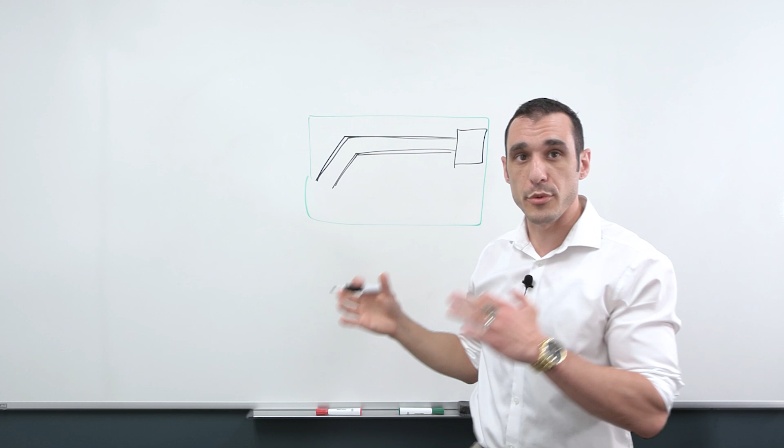I'm just going to draw out a top view of a layout, and we've got our differential pairs. Let's say they're routed at some angle like this. Here's one of my differential pairs, and here's another differential pair, being routed over to a component on some side of the board. The reason you need to take each side of the differential pair and make these traces the same length is so that you can properly read out the signal at the same time on each side of the differential pair.

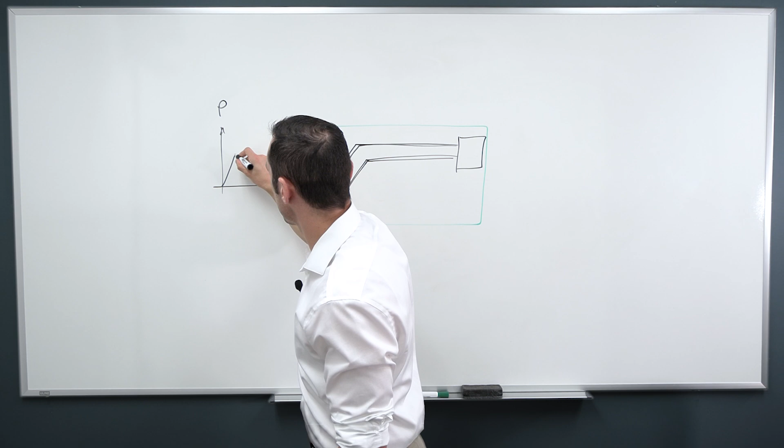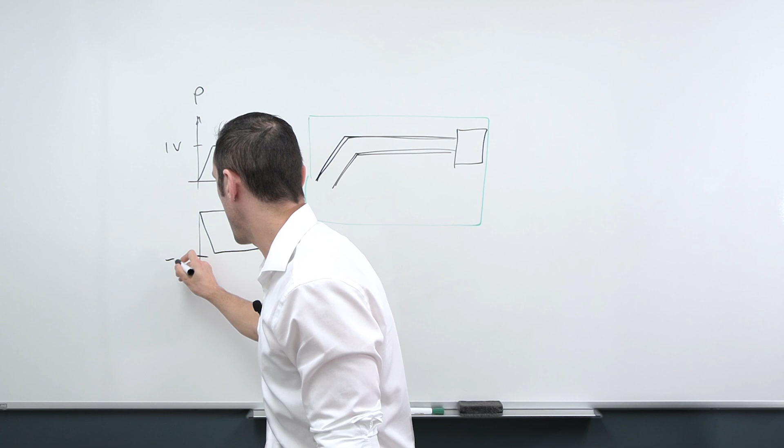Let's look at the graph of the signal to clear this up. On my positive side, I have a signal that looks something like this, and let's say that this is 1 volt. On my negative side, we have an equal and opposite signal. Ideally they have the exact same shape, and ideally this is also at equal and opposite voltage, so -1 volt.

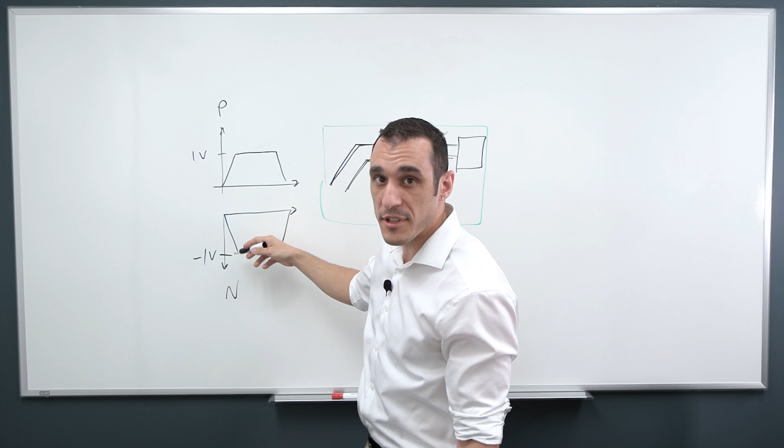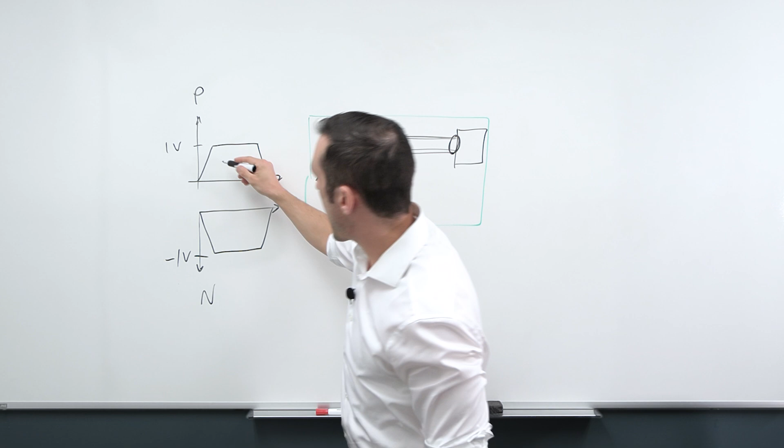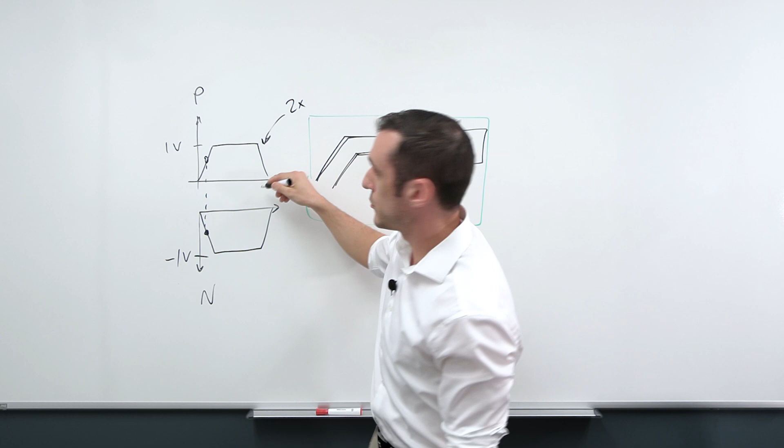In the ideal case, this rising edge of the positive signal, and this falling edge, or rising edge in the opposite direction, of the negative signal, happen at the exact same time. So when the signal arrives on the interconnect, these two signals are changing and reach their final voltage at the exact same instant as they reach the receiving component. That ensures that at this point in time, and the corresponding point on the other end of the differential pair, the difference between these two signals reads out to essentially double whatever your positive signal is, or double whatever your negative signal is, depending on what polarity you want to define.

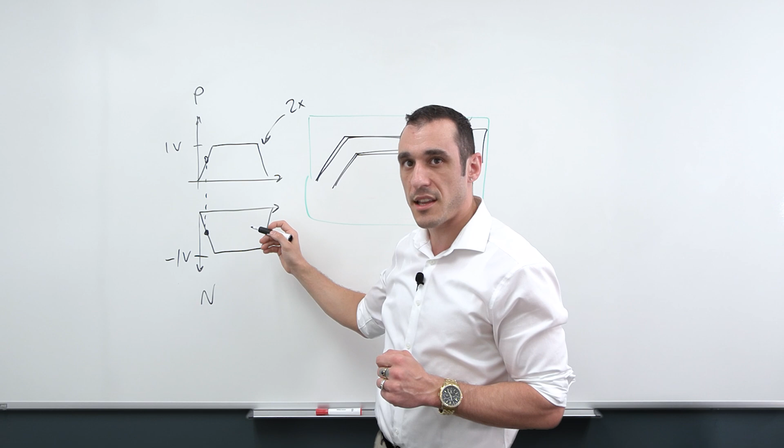This is one of the reasons we need to have the two sides of the pair length matched. When the two sides are length matched, these signals travel at the same velocity, and if they travel over the same length, they'll arrive at exactly the same time at the receiving component. So to see what happens if you don't have that enforced, let's ask the question.

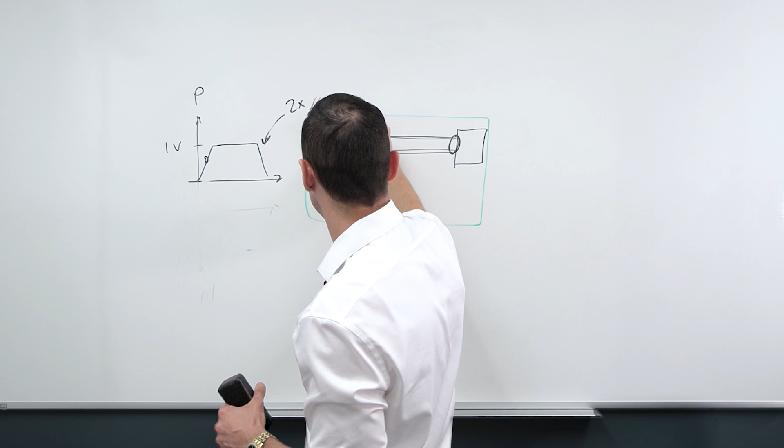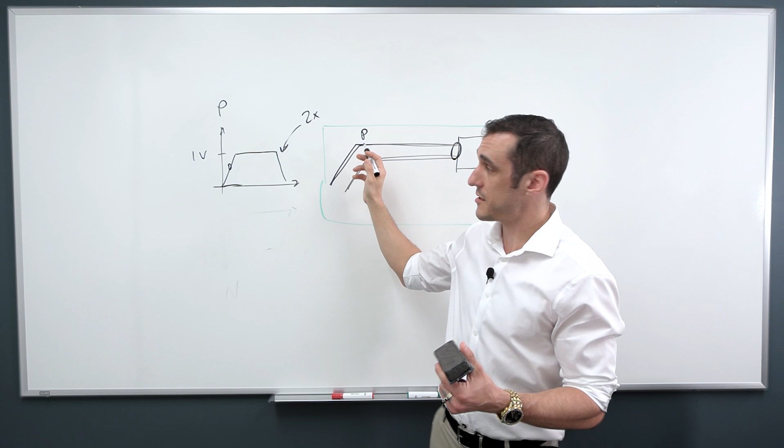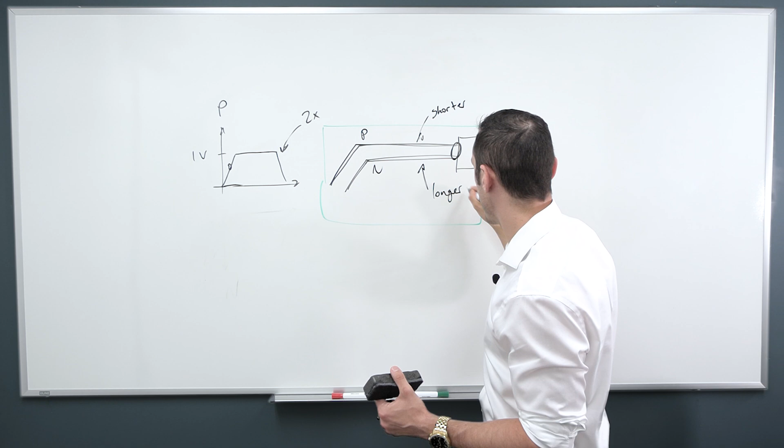What would happen if my positive side, P, and my negative side, N, have different lengths? If they have different lengths but travel at the same speed, then one of the signals, let's say the positive side, is going to arrive at a different time than the signal on the other side of the pair. Let's say this is the shorter length, and this is our longer side of the pair. So if these two have different lengths, at t equals 0, at this instant at the receiver, the positive side has a signal that starts rising.

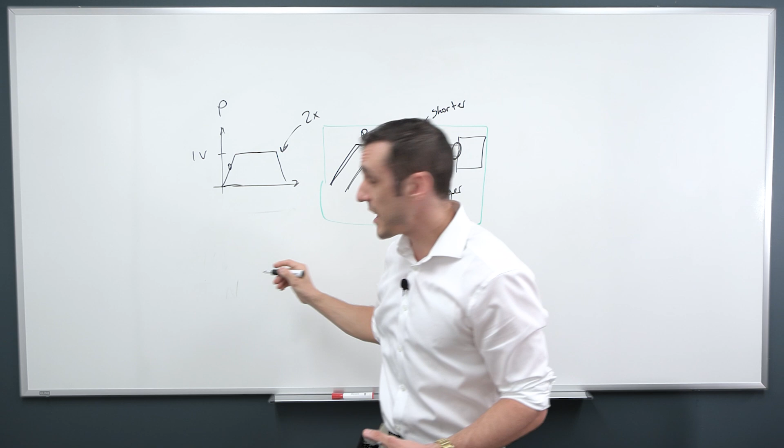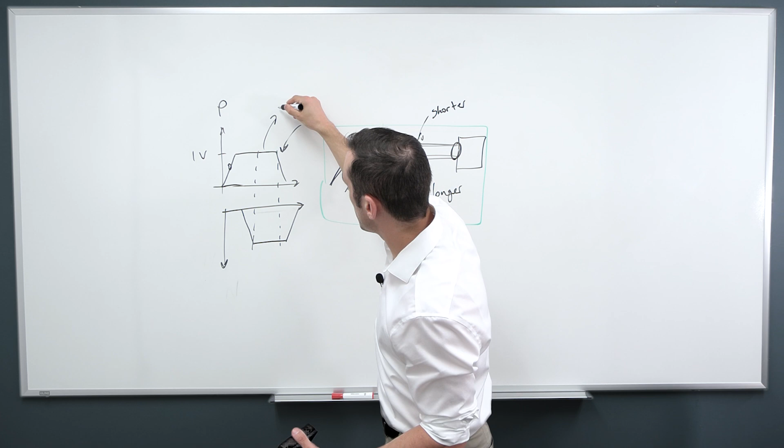Now if the negative side is longer, the signal is going to be delayed. What happens is, if it's delayed a little bit, they don't line up, and you only have a match between the two signals in this small interval of time. So the voltage needed to induce a digital logic state in the receiving component only exists within this time period, and you'd only have 2 volts measured between these two traces in this time window. If the two don't overlap, you may not read out the digital state correctly at the receiving component.

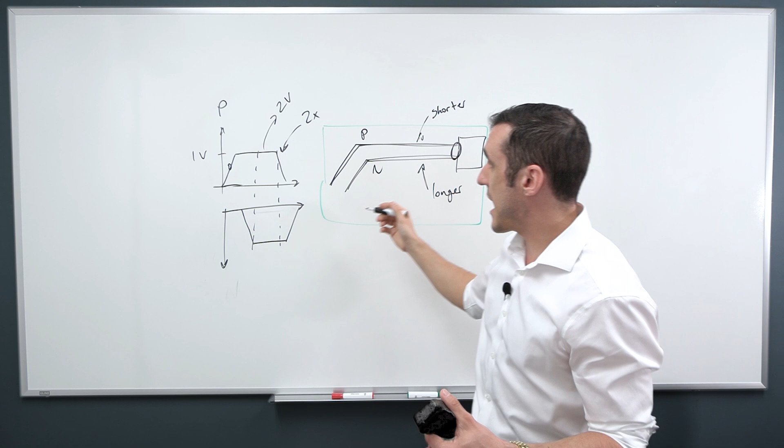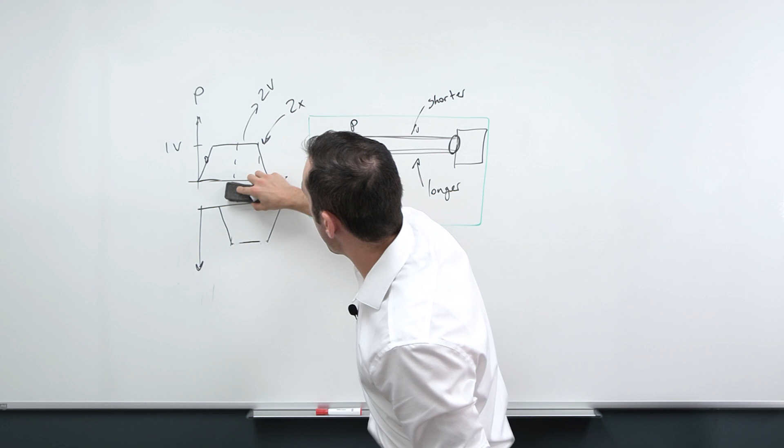Now there's another reason we need the two length matched. Reading out the digital logic state being transmitted over this pair of traces is important, but there's another reason, and that relates to being able to cancel noise from the interconnect. Let's say that way back at the beginning of this signal's life, when it was sent from a transmitting component at the beginning of this interconnect, there was a little bit of noise induced on this signal as it rose.

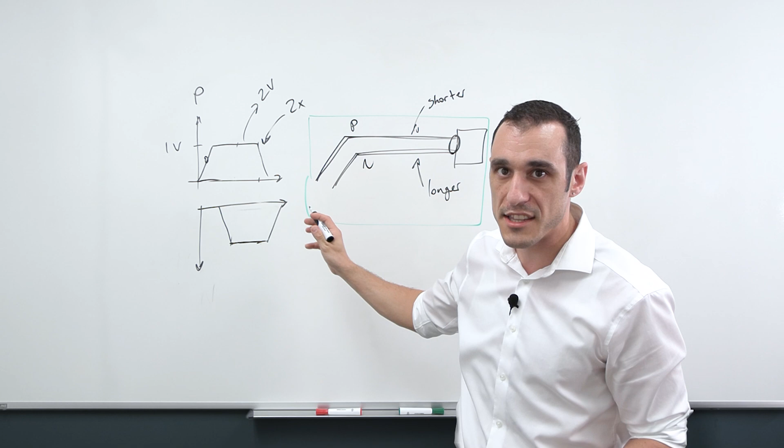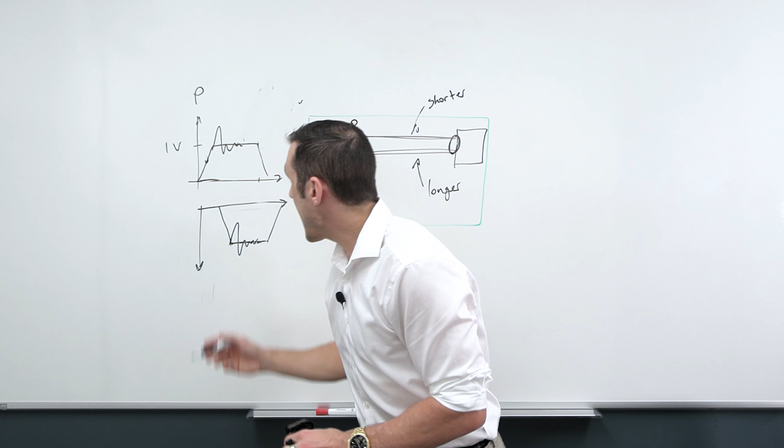On the positive signal, it started right here, and there's some bit of noise. On the negative signal, we also had that same issue back at the transmitter, and we have that same noise—so this is all common mode noise. Now if one of these signals is delayed on this transition between the transmitter and the receiving component, you now have a mismatch between the timing of these two noises.

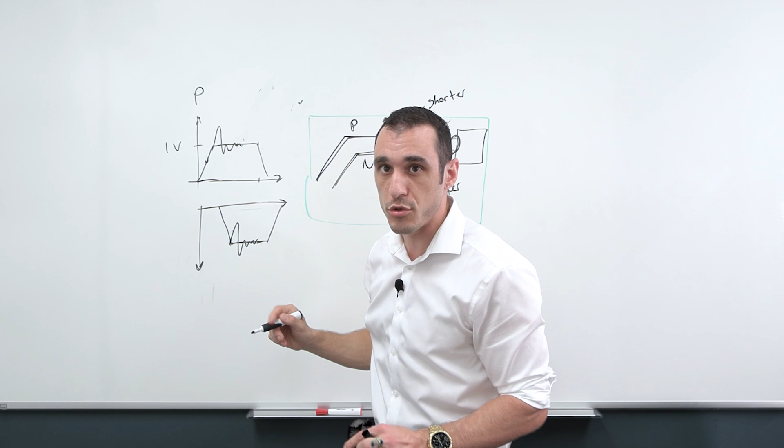So if there's any mismatch between the timing of these two noises, when I then take the voltage on the positive side minus the voltage on the negative side to read out the signal, you'll notice that I need to subtract out these two noises in time.

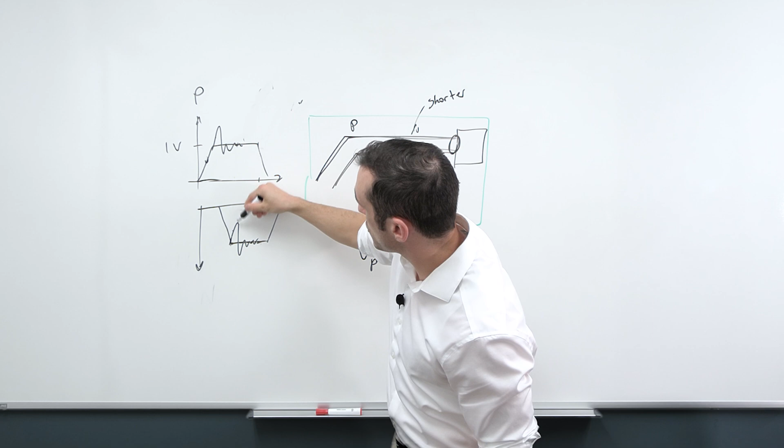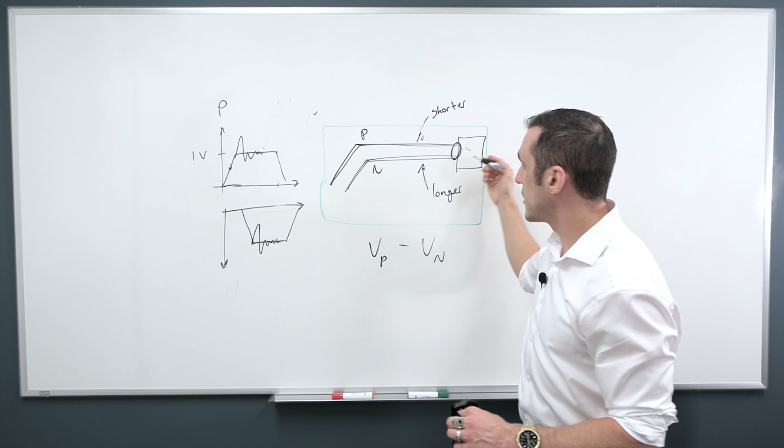But because they don't overlap, they don't actually get subtracted. This is the other reason you need to make sure the lengths of your differential pairs are matched: to ensure that if there's any noise received anywhere else on the interconnect, that noise is coincident on both sides of the pair at the exact same time at the receiving component. That's what allows the receiver to cancel out this common mode noise and eliminate it from the signal it actually needs to measure.

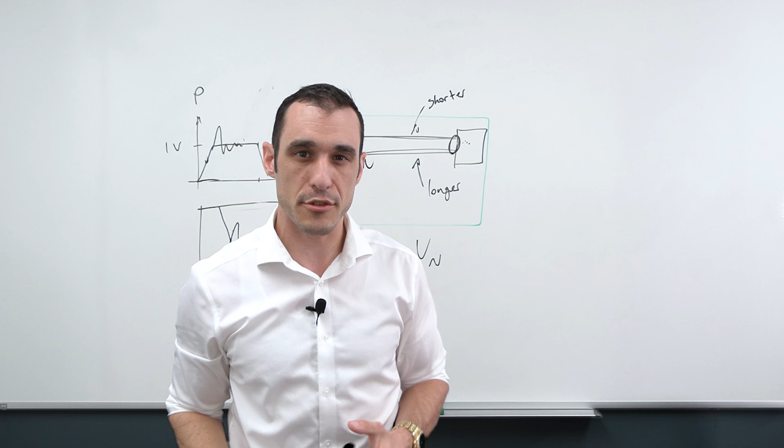In order to do this, let's say this trace is longer than this trace. What we need to do is lengthen this trace a little bit, so we need to increase its length. If you watched the previous video, you'll see I showed this little tiny structure that gets added in order to match the length of these two pairs.

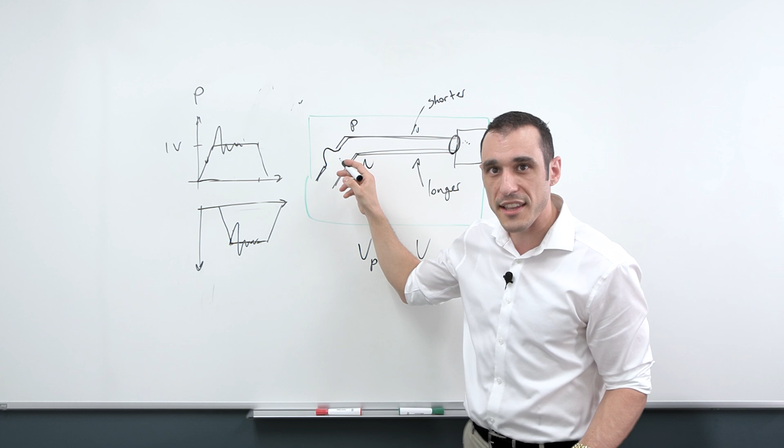Sometimes you just need to add a little bit of length. In the previous video, when I showed an overlay in Altium Designer, it was just a little nudge like this, and that was enough to bring the lengths of these two traces to the same length so the two signals line up in time. Then you can properly cancel out the noise and read the signal level over this entire unit interval.

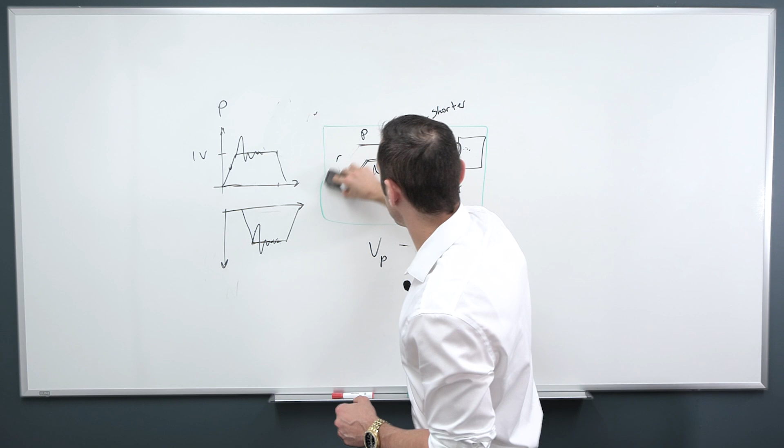Now sometimes the length matching you need to enforce is a bit more extreme, so maybe you don't have one of these little bumps here. Sometimes what you'll see is a series of bumps like this. This is sometimes called serpentine routing. There are a bunch of different names for these different types of structures, but this is the most common one, which is just serpentine routing.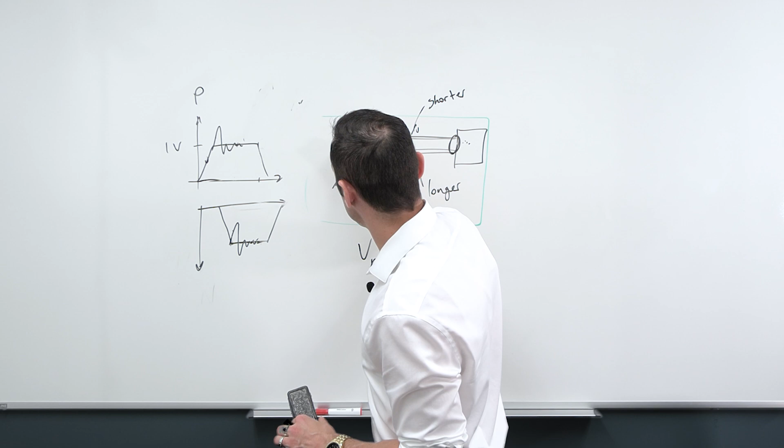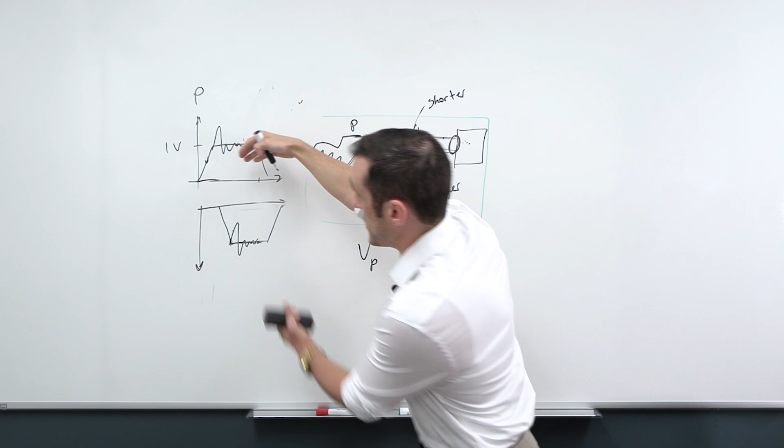Sometimes you can get a bit more interesting with your length matching, and you'll see something that looks like this trombone structure, called trombone length matching, or sometimes accordion length matching. There are different names for it based on the shape of the structure you need to enforce. The idea is you pack this large section of trace on the positive side in order to lengthen this trace enough that these two signals overlap in time. Then you can correctly remove all the noise from that signal.

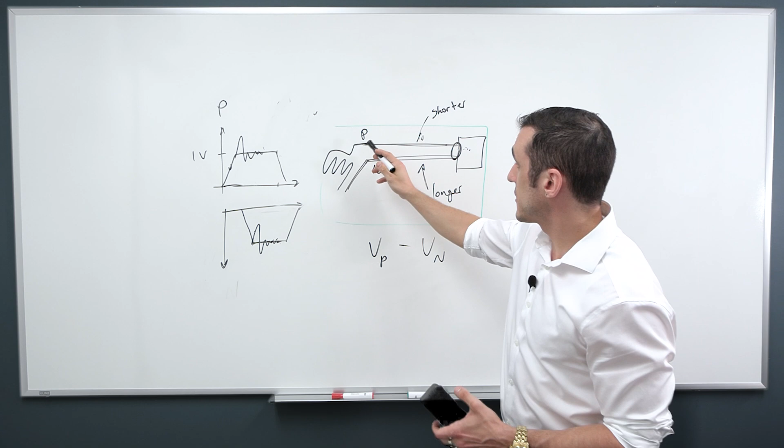If you're using Altium Designer, or another design software, they have tools that will automatically add in these sections of trace length so you can make sure your differential pairs are properly length matched over the entire length of the interconnect. Those are accessible just in the standard routing tools - it's not like you need to buy an extra package to do that.

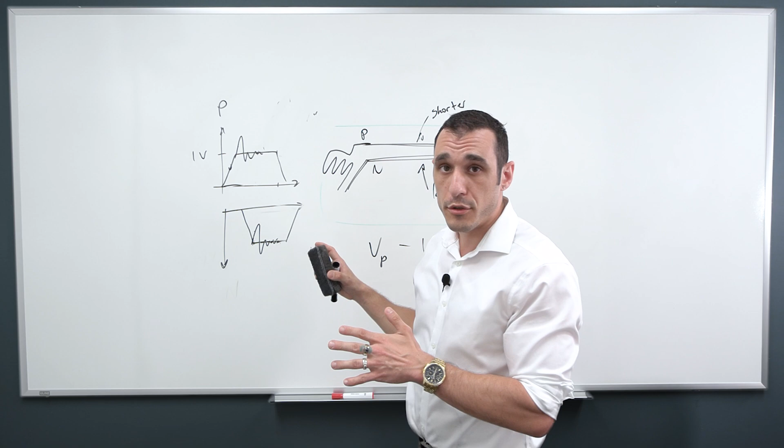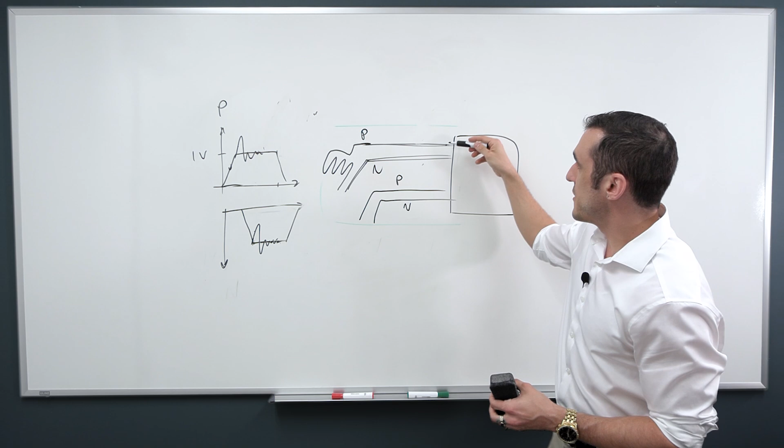The next thing I want to look at is that sometimes you have groups of differential pairs being routed to a very large component. So I'll use this as an example - here's my positive side, here's my negative side. Sometimes you have to make sure that not only do the two sides of the trace within a pair match up and align at the same time, but also between different pairs - they also need to match up, and signals need to arrive at the same time.

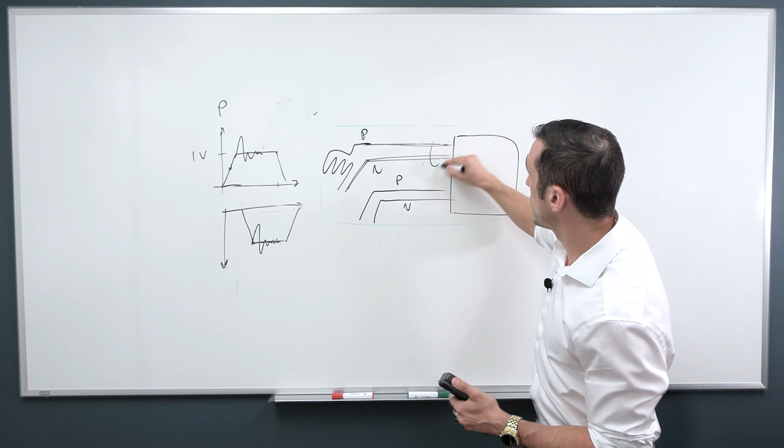Sometimes what you have is one pair having one length, and your second pair having a second length, L2 versus L1. If L1 is longer than L2, what do I have to do? Well, I can't make L1 shorter - I suppose I could, but it's actually a lot easier to just make L2 a little bit longer.

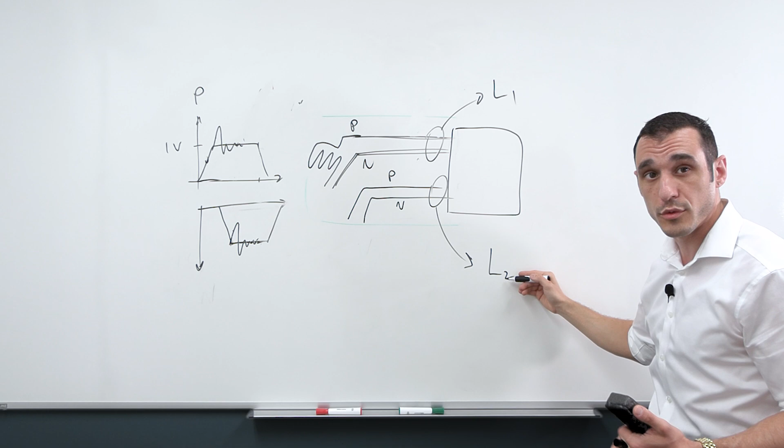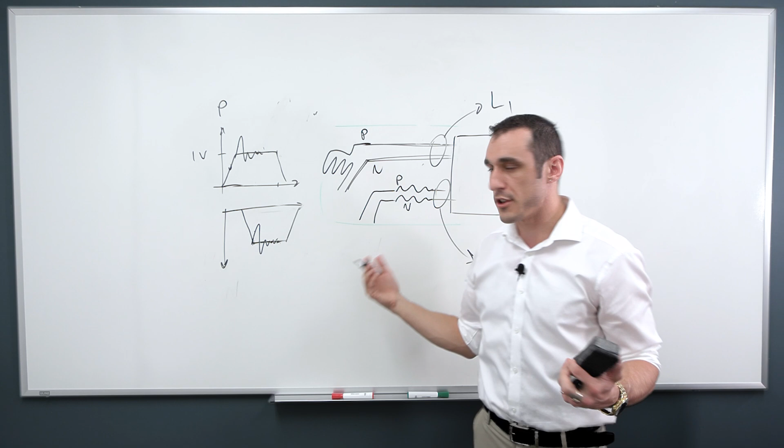To do that, you would apply length matching to both traces. The length matching you apply needs to be symmetric. If you go on Google Images and look up length tuning structures for PCBs, or a similar search query, you'll see a lot of really interesting images showing how this gets enforced. We're going to have some demo videos on the channel that show how you can enforce that and what it looks like on a PCB layout in your CAD tools.

Hopefully this shows you why you need to length match each side of a differential pair, and sometimes why you need to length match multiple differential pairs.

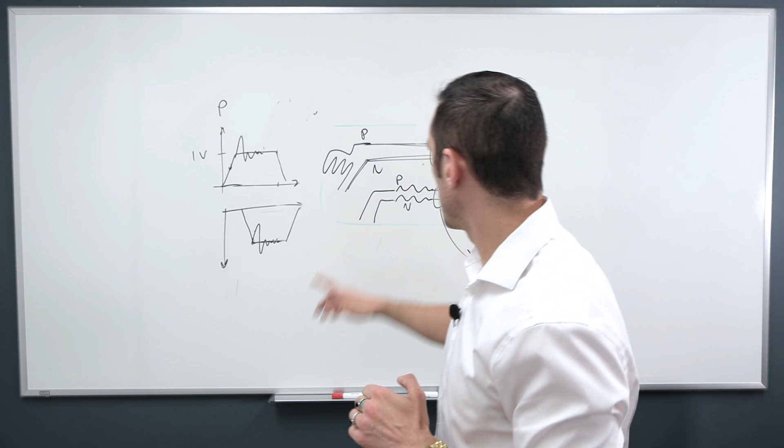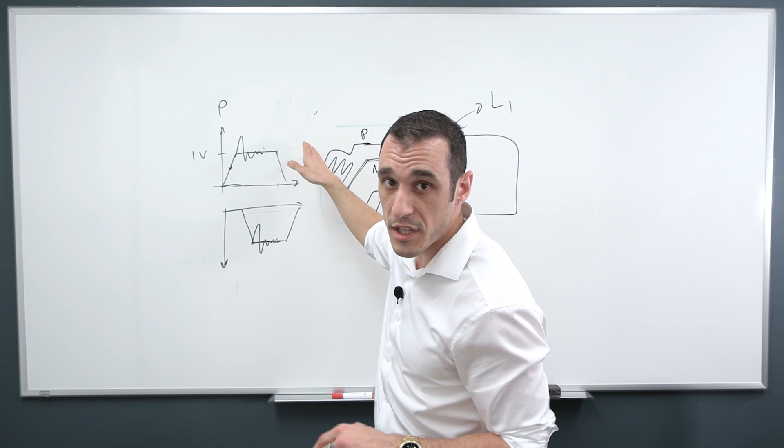One important thing I didn't mention: when you apply those length matching structures, sometimes you need to apply different structures on different sides of a trace, and it's actually best to do this closer to the transmitting end rather than the receiving end. Remember, the receiving end needs to perfectly match up these two signals in order to read the difference between them, so you can properly read out the digital logic state that you need to transfer down this pair.